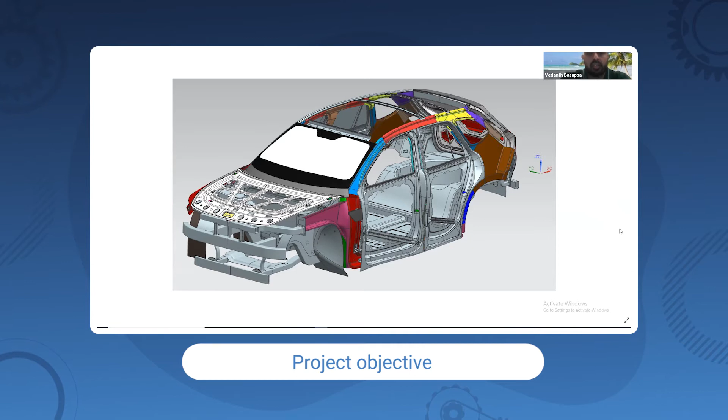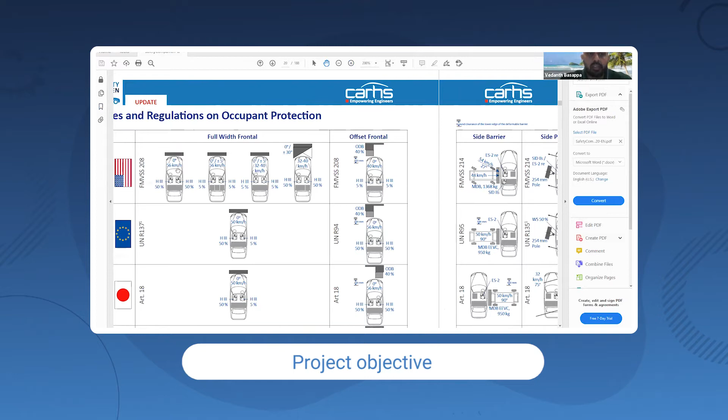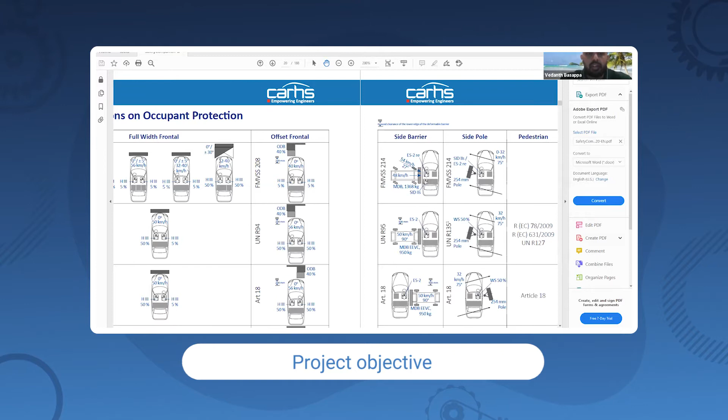Yeah, so that's my vision. These are all the different load cases I wanted to quickly show the students: the frontal load cases I was envisioning, like using a flat barrier frontal crash, and then something we could use like an ODB, which is a 40% offset barrier, and then we could even use the 30-degree wall to run the frontal crash analysis. And then coming to the side, we have the side barrier itself, and the 214 SID-IIs and ES-2re which we could use for the side pole impact.

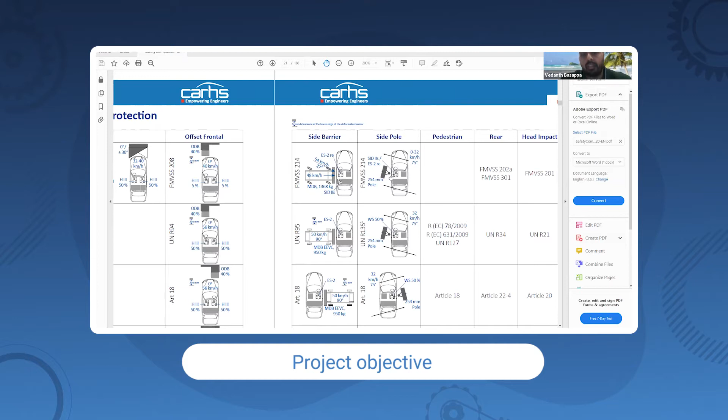And then we have the standard rear crash, which would be like a 70% offset, and then a flat barrier. And then, like I said, there is the roof crush, we could use the roof crush 216a. So these are all the different load cases available, which we can run for this vehicle program and project.

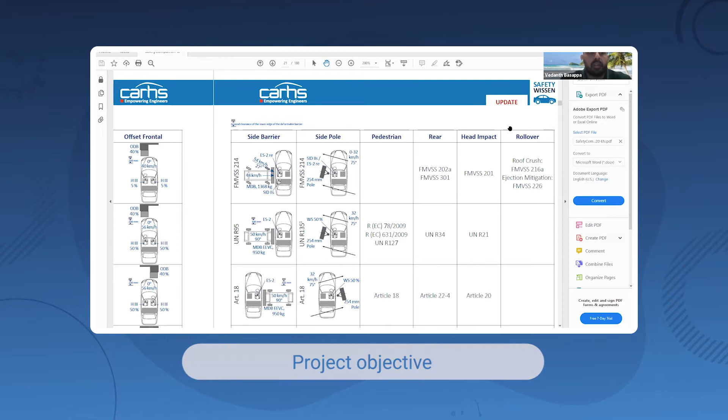I'll just give a quick introduction. So guys, a research program is nothing but a 12-week program. It's an online live program where a group of 5 to 6 students max will be working with the lead researcher, which in this case is Vedanth.

So you'd be working closely under his supervision to simulate crashworthiness analysis, or to perform crashworthiness analysis on the SUV model that we have developed, right?

Mr. Vedanth is on the R&D program on research crash analysis. So if you go through this, it talks about what type of analysis, what type of load cases you'll be working on, and then what type of outcomes you can expect, right?

So one of the things we're going to be very particular about here is, if a student actually does extremely well in this particular program, they get a personalized LOR, right? Remember, you're not going to get a letter of recommendation just for participation. Vedanth has to feel that you are really amazing, you are able to think very well, and you're also able to deliver projects on time.